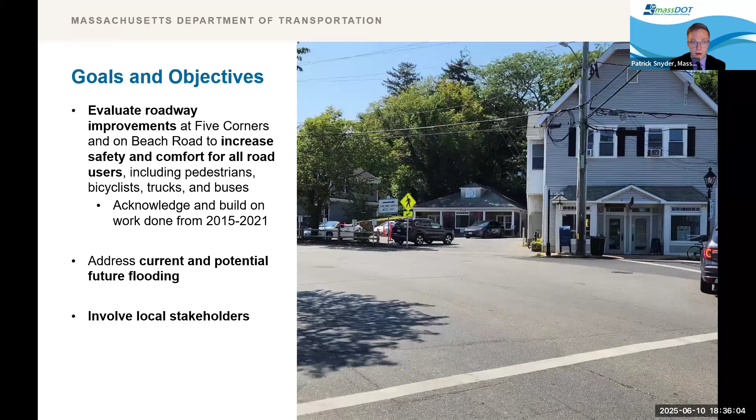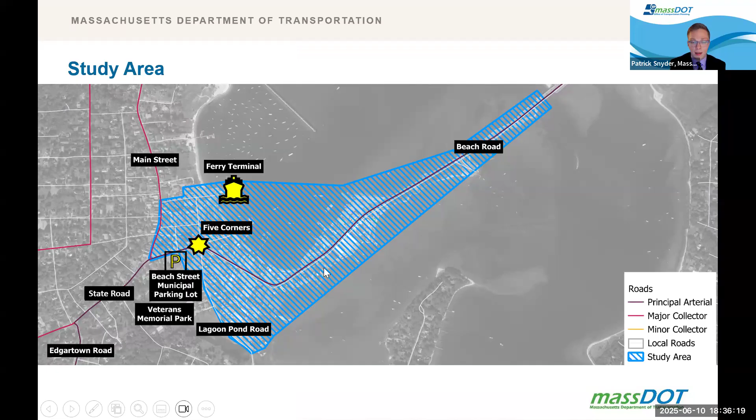MassDOT recognizes this is a key challenge at this intersection, and we want to collaborate with local stakeholders to address flood vulnerability and on decision-making here. This map shows the extent of the boundaries of our study area, which extends along Beach Road to the Tisbury Town line, down a portion of Lagoon Pond Road, and it is also bounded by the Beach Street Municipal Parking Lot, Main Street, and the Steamship Authority Ferry Terminal.

And we'd now like to review our initial flood vulnerability assessment. The existing drainage system at Five Corners is key to any flood mitigation work done at this location. There are outfall pipes in the study area at Beach Street Extension, Lagoon Pond, Main Street, and Beach Road.

These pipes form part of the stormwater management system, facilitating drainage off of streets and properties. MassDOT and the town of Tisbury have identified challenges with the existing drainage system that make it difficult to manage stormwater. The low elevation, effectively at current sea level, makes it vulnerable to storm surge.

Flooding regularly occurs at Five Corners due to backup at the Beach Road Extension outfall pipe, as well as drainage that slopes down to Five Corners rather than to coastal outfall points. The Beach Road Extension outfall pipe also gets blocked up during storm events, which contributes to backflow and further exacerbates the flooding issues.

MassDOT has proposed drainage improvements under Highway Division's project number 609459 to help mitigate stormwater at Five Corners.

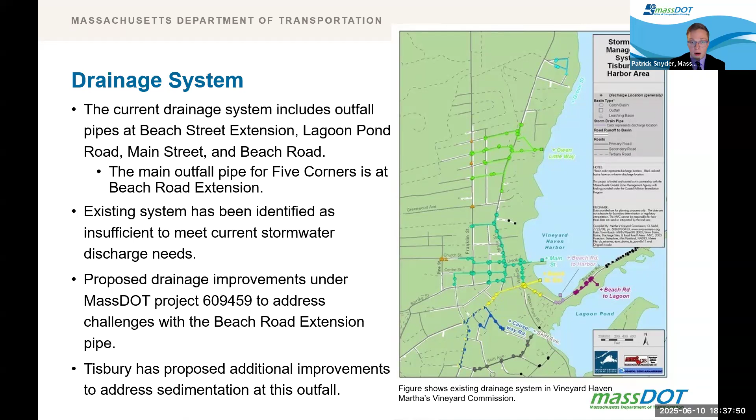As you'll see on the following slides, stormwater challenges are exacerbated by future year flood vulnerability. We will also note on this slide that the town of Tisbury and other stakeholders have proposed additional flood mitigation measures here. We are happy to continue dialogue about that, as there are multiple jurisdictions in this area.

Part of this study involved looking at future year flood models to understand projected sea level rise and how it may affect the study area.

In planning for flood mitigation at Five Corners, it's important to consider how any potential projects could mitigate future flooding, as well as the current stormwater issues.

Stormwater flooding on top of this sea level would exacerbate water levels, as we will see in coming slides. We'll also go over this more during our alternatives analysis review later in the presentation.

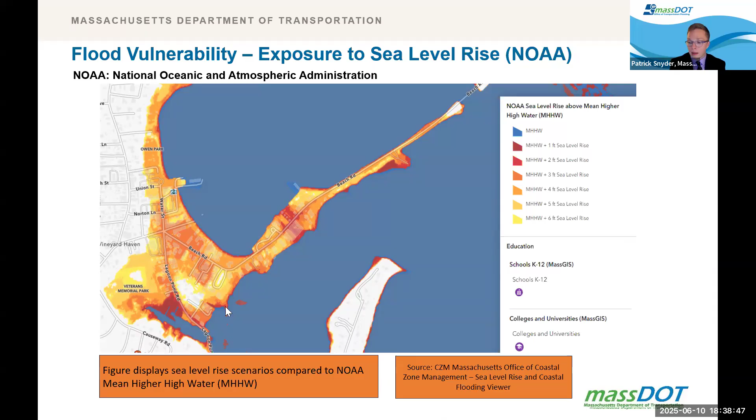The main horizon year we focused on in this study is 2030, and I will elaborate on that later in the presentation during the alternatives analysis.

This data comes from the Massachusetts Office of Coastal Zone Management, CZM, which is the lead policy, planning, and technical assistance agency on coastal and ocean issues for the Commonwealth.

Any future projects to address flooding in this area would likely require coordination with CZM.

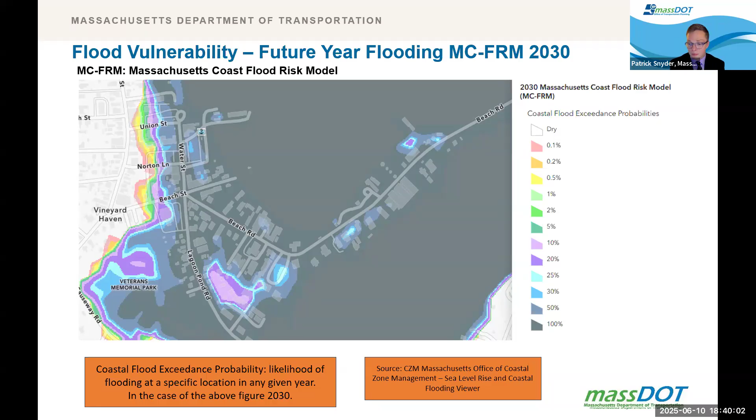This indicates that during a storm event, most of the study area will be flooded beyond the area that already floods today. As part of the study, we carried out flood modeling in order to review potential horizon years to plan and develop concepts.

Per direction, we used the Resilient Mass Action Team model, which is a risk screening tool developed as part of the state's resilience planning initiative called Resilient Mass.

RMAT is a preliminary risk screening tool that outputs results based on categories assigned to assets, such as their critical operation during emergency events. Assets, in this case, being transportation infrastructure, buildings, and natural resources, to name a few.

Inputs to the RMAT tool resulted in targeted planning horizons of 2030, 2050, and 2070.

Mean higher high water level, MHHW, is a measure that indicates the highest level water can reach. For these years, 2030, 2050, and 2070, there was a minimum of 3.7 feet for sea level rise in 2050 as output by RMAT.

This would be during the highest high tides during the year. When it comes to sea level rise and storm surge, RMAT recommended a target planning horizon of 2070, with an intermediate planning year of 2050.

Based on the criticality of Five Corners in the Martha's Vineyard transportation network, the output was to plan for a 1,000-year storm return period, the probability of a storm occurring in a 1,000-year return period, on the stormwater flooding side of things.

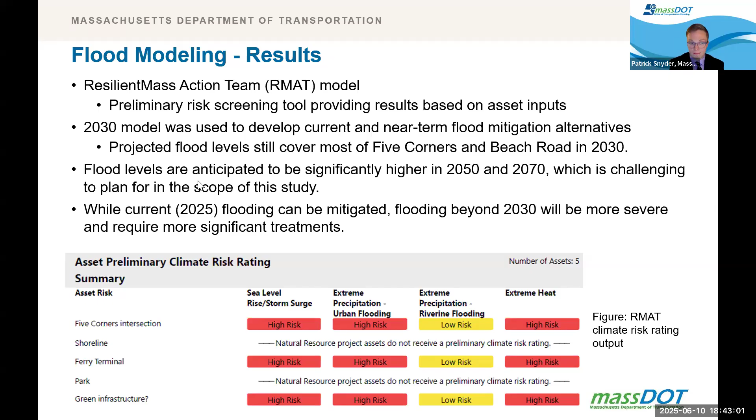At this point, I'd like to pass it to Joe Zissman from our consultant team at Cambridge Systematics to give an overview of our safety analysis, which helped inform subsequent alternatives analysis for roadway improvements.

Thank you, Patrick. We analyzed crash data from 2018 to 2022 for the study area. One fatal crash occurred, a nighttime head-on collision of two vehicles on Beach Road near the Lagoon Pond Bridge. Two injury-causing crashes occurred at Five Corners, one involving a pedestrian and the other a bicyclist. The study area as a whole saw 18 additional injury-causing crashes.

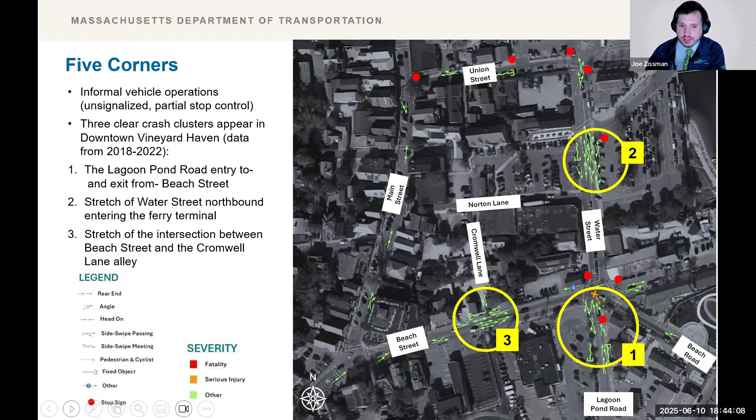Three clear crash clusters occurred in downtown Vineyard Haven between 2018 and 2022: the first at Five Corners on the Lagoon Pond Road leg, the second on Water Street northbound at the access point to the ferry terminal, and the third on Beach Street where it intersects the Cromwell Lane alleyway and the municipal parking lot. Five Corners is designated as a top crash location, and a road safety audit was carried out there, which was one of the reasons this study was carried out.

The study area sees a large volume of pedestrian traffic. It's a village center and business hub for those who visit Martha's Vineyard, live there, and work there. It has a ferry terminal with service to Woods Hole, the island's primary post office, a full-service grocery store, the Black Dog Tavern, many other small businesses, and a small number of residences.

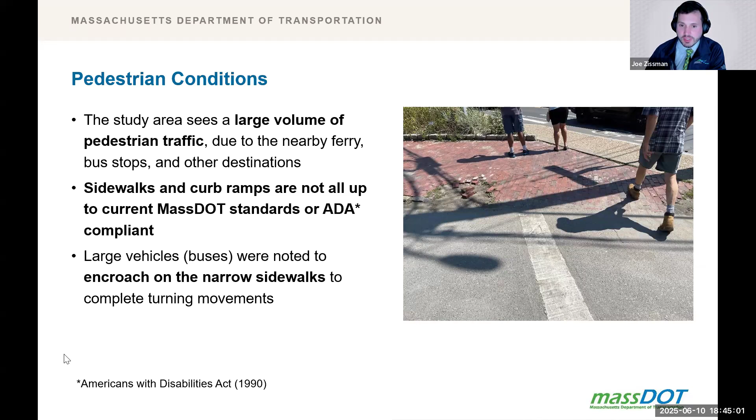Sidewalks and curb ramps are not always sufficient for pedestrians. Some are narrow or obstructed with poles. Brick sidewalks can be uneven for those with mobility challenges. Crosswalks and the ramps leading to them are not perpendicular to the road and are not clearly marked for accessibility. No pedestrian flashers or other pedestrian signals exist. Street lighting is generally poor. Some turns are also too tight for large trucks and buses accessing Water Street, and we observed these vehicles mounting the sidewalk in some cases, a dangerous situation for pedestrians.

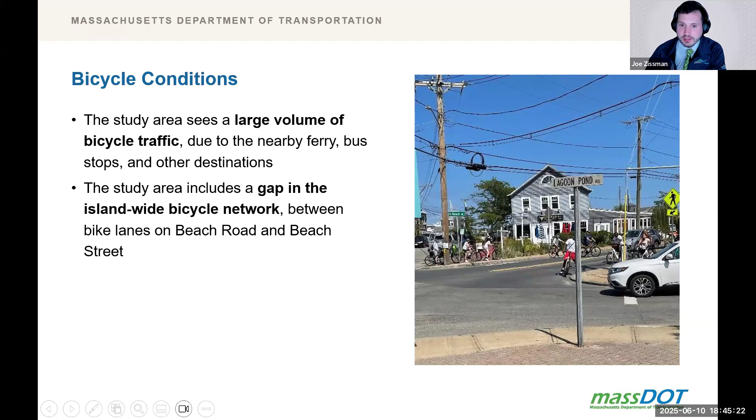The study area sees a large volume of bicycle traffic, driven not only by destinations in the area but also by the strong commitment Martha's Vineyard communities have made to building a robust bicycle network. A gap exists in that network within the study area — a missing link in the island-wide shared use path network between Oak Bluffs and Edgartown through the Five Corners area. On the basis of all this analysis, this study discusses high-level conceptual design alternatives for the study area.

The alternatives have two components that mirror the two components of the analysis. The first, safety and road treatments, focuses on improving multimodal operations and safety, primarily through changes to roadway geometry, signage, and control. The second is adapting to and mitigating the impacts of near-term flooding. While the study analyzed and considered long-term flooding, as Patrick mentioned, more significant analysis will be required as part of any project development.

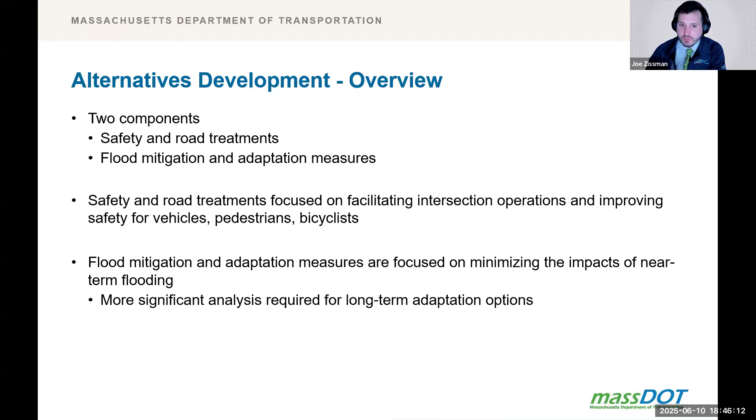The conceptual design alternatives are presented as short-term, medium-term, and long-term, at two locations: Five Corners, and the intersection of Main Street and Beach Street. We will present the alternatives for Five Corners first.

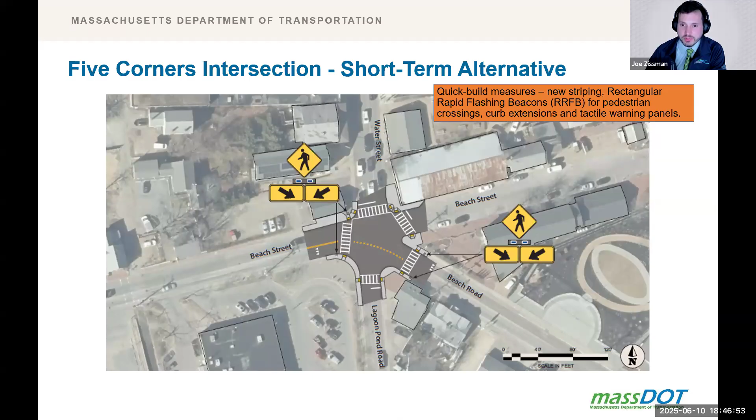The short-term alternative for Five Corners includes rebuilding sidewalks to be ADA compliant, including curbing and curb ramps with tactile strips, realigning crosswalks to be perpendicular with the street, repainting all crosswalks to improve visibility, installing indicator signs for crosswalks potentially with rapid flashing beacons, repainting stop lines on Lagoon Pond Road, Water Street, and Beach Street Extension, painting new shark's teeth yield lines on approaches without stop signs, and painting a curving yellow line to connect the center lines of Beach Street and Beach Road. These are designed to be relatively low-cost improvements that can be implemented relatively quickly.

The medium-term alternative for Five Corners includes the low-cost quick-build measures from the short-term one, but makes two substantial changes to roadway geometry. First, Water Street is narrowed from three lanes to two, allowing for the construction of a shared-use path for pedestrians and bicyclists. Second, Beach Street Extension is raised and turned into a shared street for cars, pedestrians, and bikes — also known by the Dutch term Woonerf. The street would have pavers instead of an asphalt surface and would be accessed via a ramp-like sloping sidewalk from the level of the intersection.

This has several benefits. It creates a clear physical through line from Beach Street to Beach Road and simplifies the apparent complexity of the intersection from 5 legs to 4. The raised surface also potentially allows for stormwater storage underneath Beach Street Extension and resloping of the outfall at the end of the street to improve drainage.

Access to Beach Street Extension would be maintained for all adjacent homes and businesses under this proposal, and it would also still potentially be available for parking. The space could be allocated in a number of different ways during the project. It would just appear less like a typical street and more like a driveway.

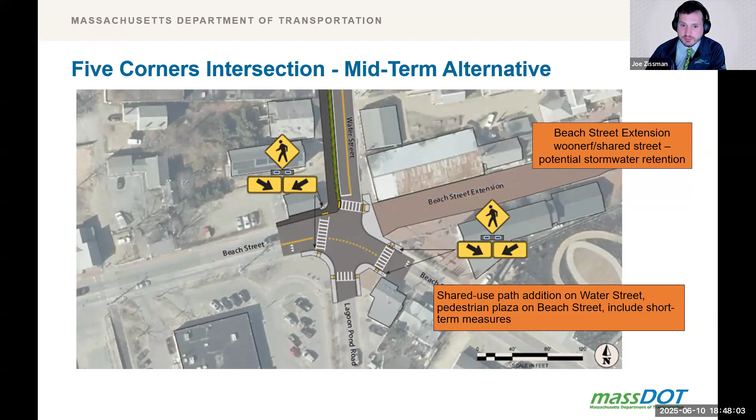2 long-term alternatives were developed for Five Corners: a stop-controlled intersection and a roundabout. The stop-controlled option differs from the prior alternatives by making more substantial changes to roadway geometry and alignment. Specifically, Lagoon Pond Road is curved so that the intersection becomes more perpendicular, resolving the current tight turning radius that brings trucks onto the sidewalk. This alternative also includes a shared-use path along the south side of Beach Street and Beach Road, accomplished by narrowing Beach Street to 2 formal lanes. This alternative may require additional right-of-way, which would be evaluated as project development proceeds.

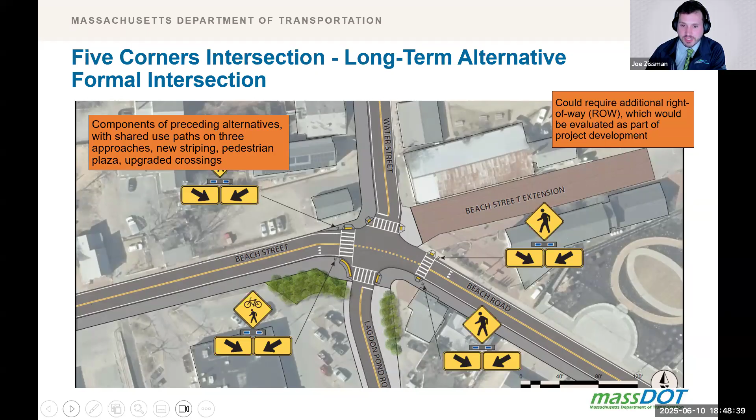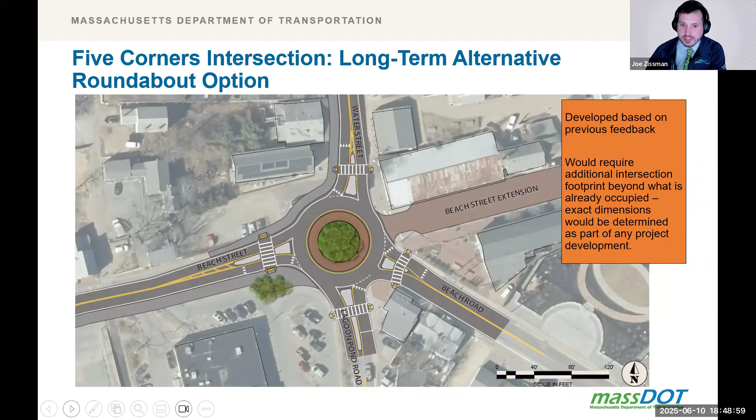The roundabout option at this location has been discussed in the past and would require substantial additional footprint beyond the current extent of Five Corners. This is one possible location where a roundabout could be centered, but it could move all around the potential outline of the intersection. Note that the width of the Beach Road approach at the roundabout prevents the inclusion of a shared-use path under this scheme.

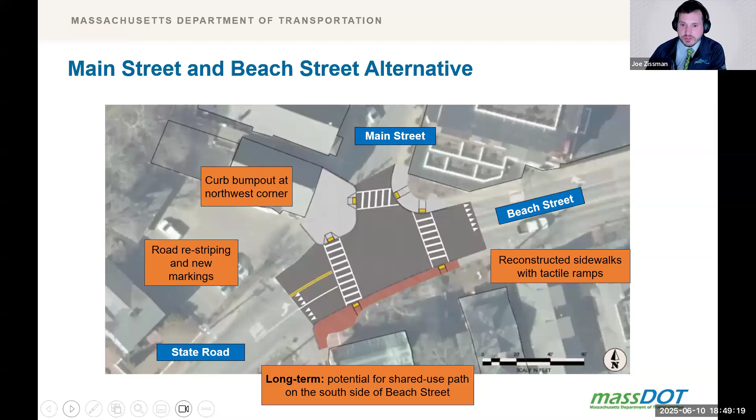A single set of improvements was developed for the intersection of Main Street at Beach Street, consisting of quick-build improvements to sidewalks, ramps, crosswalks, and roadway markings. A long-term enhancement, which is not drawn, could extend the shared-use path from the long-term Five Corners alternatives through this intersection on the south side of Beach Street and State Road.

Patrick will take you through the alternatives analysis, which includes a discussion of infrastructure elevation. Five Corners sits at approximately 2.5 feet above mean sea level in 1988, also referred to as NAVD 88. This study considered raising the intersection in the long term to either 5 feet above NAVD 88, which is 2.5 feet above current ground level, or 5 feet above the current ground level, which is 7.5 feet above NAVD 88.

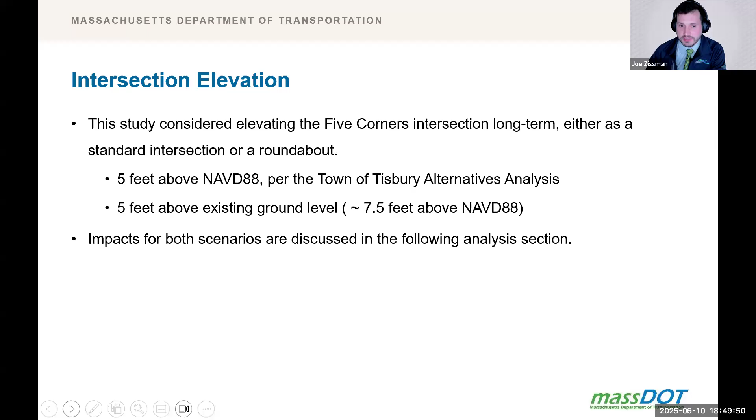Thank you, Joe. So we'd now like to review our alternatives analysis, which is an outline of anticipated roadway impacts and potential flood mitigation measures.

In terms of anticipated impacts related to roadway elements, we've split those up amongst the short-term, midterm, and long-term alternatives. When it comes to the short-term alternatives, these are anticipated to result in safety and operations improvements for pedestrians and bicyclists, as well as vehicles. They would upgrade the intersection to current MassDOT standards and create new ADA-compliant pedestrian infrastructure. Short-term alternatives would likely be insufficient to address the current turning radius challenges for large vehicles, such as buses and large trucks. The short-term alternatives are conceptualized within existing right-of-way footprints.

I'll note on this and the next slide that potential right-of-way impacts are fully evaluated later in the project development process. The midterm alternative for the Five Corners intersection is anticipated to have the same impacts I listed for short-term. The midterm alternative builds off the short-term alternative with some additional improvements, a shared-use path along Water Street, and a potential raised shared street at the Beach Street intersection.

The short and midterm alternatives would likely have temporary construction impacts if they advance to project development. These could be access changes or noise related to construction activities. These impacts would be assessed at a more detailed level during project development, and presented as part of any design public hearing.

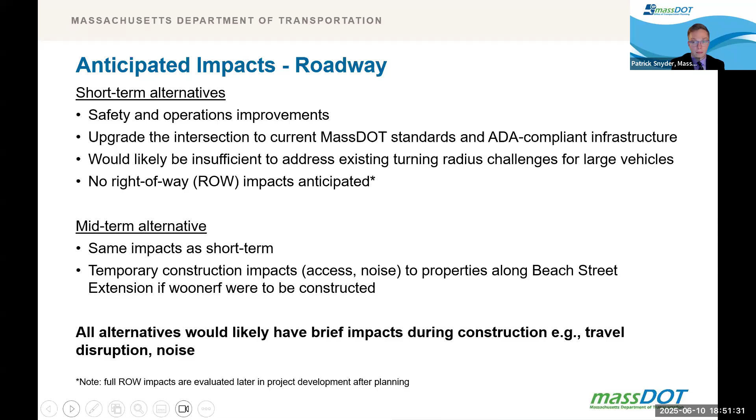Looking at the impacts of the long-term alternatives, they would both formalize the intersection, which is anticipated to have safety benefits. Delineating clear travel path priority would clarify road user right-of-way. The pedestrian improvements would also be expected to enhance safety for vulnerable road users. When it comes to the roundabout option, the number of conflict points for vehicles traveling through the intersection would be reduced. So there are also safety improvements anticipated with that alternative.

Long-term changes at this location could also address the current turning radius challenges for large vehicles that have been mentioned. The long-term alternatives could also increase bicycle connectivity by contributing to the island-wide bicycle route, with the potential for extended shared use paths on Beach Street and Beach Road, alongside a potential connecting shared use path on Water Street.

The full intersection, alternative 1 here, would be designed so as to accommodate the turning radii of large vehicles. This would facilitate travel for large trucks and buses. The roundabout, which we have listed as alternative 2 here, would also be designed to accommodate large turning radii.

It would likely have right-of-way impacts, as the current intersection footprint is somewhat constrained for a roundabout of standard size. For this study, we assumed a roundabout of 105-foot radius, centered on the northwest corner of the Five Corners intersection. The ultimate footprint and associated right-of-way impacts would be assessed in future project development stages.

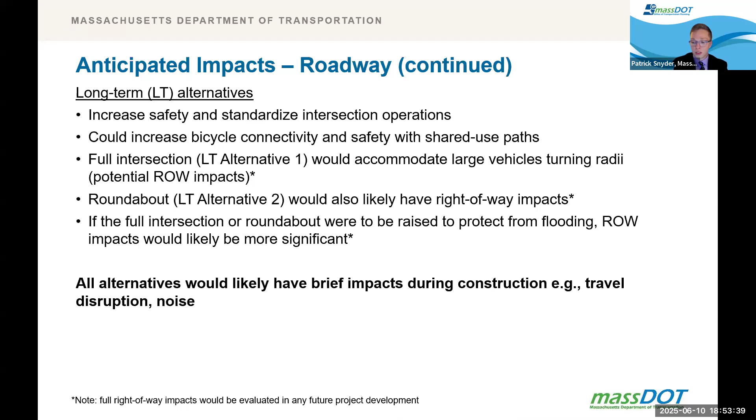As I mentioned on the last slide, there would likely be temporary impacts associated with construction activities, such as noise, access, anything else related to construction.

We've developed high-level summary cost estimates with unit costs based on 2024-2025 dollars and based on historical MassDOT cost data. For purposes of estimation, the short-term improvements are assumed to be implemented in 2025 and the midterm in 2027. Long-term alternatives did not assume a construction year, as they are contingent on potentially incorporating flood mitigation measures. However, they do include contingency costs. These are all estimates and would be subject to change during any potential project development.

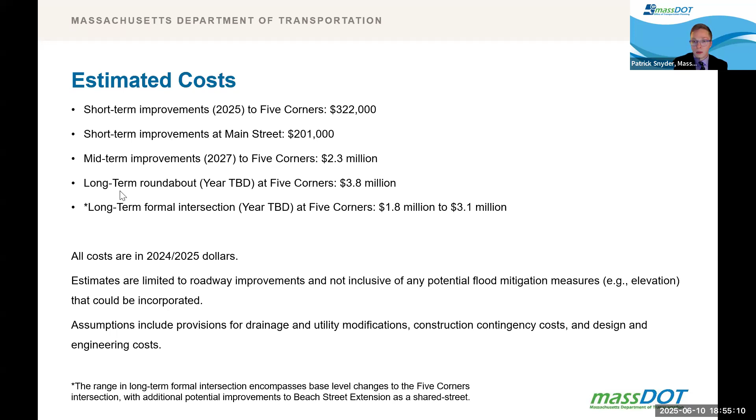Going through the list, we have the short-term improvements estimated at $322,000, with the additional potential improvements at Main Street, the short-term ones being $201,000. Midterm improvements at Five Corners we estimated at $2.3 million. Long-term roundabout would be base level $3.8 million, and the long-term formal intersection at Five Corners would be between $1.8 million and $3.1 million, with the range based at base level changes to the Five Corners intersection, and the larger end of that cost including a potential Woonerf at Beach Street Extension, that shared street concept discussed as part of the midterm improvements.

We discussed a variety of flood mitigation measures for this study. This included a stormwater retention tank under Beach Street Extension or another location, as well as potentially elevating these roadways. A stormwater retention tank in this area could provide storage capacity for flood waters during storm events. However, a location for this would need to be determined based on stakeholder consensus, necessary storage capacity within the tank, and likely a hydraulic analysis.

If Five Corners or Beach Street Extension were elevated, a retention tank could be placed under the intersection itself. Along with this would likely be the need for a pump system, which would need to be maintained. That being said, because of the anticipated volumes of floodwaters, a stormwater tank might be insufficient and likely would not protect the study area from wave action along the harbor line coming in from the coast. Hydraulic analysis of these effects is outside this study's scope of work.

Along with the impacts of flooding itself, with any associated construction here, there would be those temporary impacts we discussed: noise, access. There would also likely be right-of-way impacts to abutting properties if any infrastructure here were elevated and raised.

The elevation levels that we considered during the study, based on internal discussion and suggestions from the Town of Tisbury and the Alternatives Analysis Report, which looked at flood mitigation options, were 5 feet and 7.5 feet above the NAVD 88 measure, the standard benchmark for sea levels. Stormwater flooding in 2030 is projected to be above these levels, at about 7.8 feet near the shoreline in a 20-year return period, and at about 11 feet in the 1,000-year recurrence planning horizon. Return periods, which I referred to earlier, are benchmarks that indicate how severe flooding will be in a given year based on the recurrence scenario.

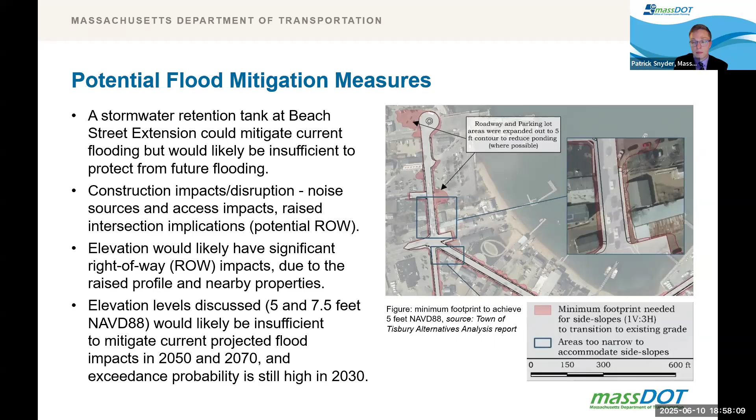Considering all of this, the roads in this study area would likely need to get elevated above 7.5 feet above NAVD 88, the level of which would need to be determined during project development. Naturally, this would likely have significant impacts. Thinking about the 2030 horizon year that we evaluated, with the time that it would take to design, engineer, and implement a project, the flood mitigation measures we developed in this study could become obsolete soon after completion.

So, looking at these impacts, we do see a significant amount of flooding projected for 2030. When we think about the project development timeline, the time it would take to initiate, design, engineer, and construct a project, that likely approaches 2030. So any implemented alternatives outlined in the study could quickly become obsolete and likely would not be sufficient to protect from flooding. With the projections for 2050 and 2070 being more severe, these flood mitigation measures likely would not address flooding beyond 2030 either.

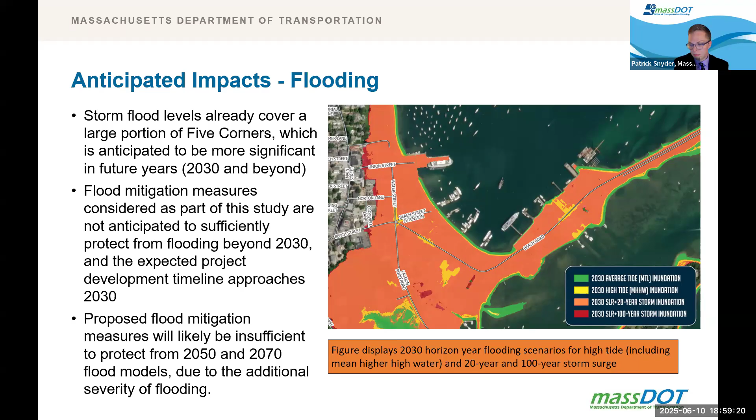Looking at stormwater, which further increases the water elevation and causes more significant waves, building on that flooding: for the 20-year storm event in 2030, this could be between 7.7 feet at the base level, with waves potentially causing up to 8.8 feet of flooding. When we look at the 100-year storm event in 2030, the anticipated flood heights are higher, with a 9.3 base level and 10.4 feet including waves.

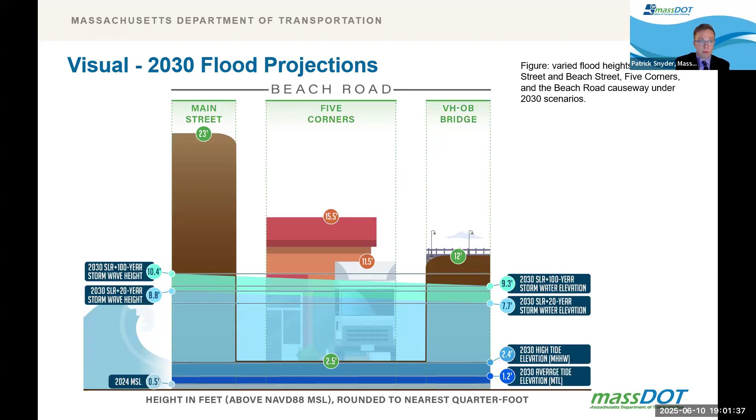So we've reached a point of discussion about how high roads could get raised if they were to be raised. This requires more detailed analysis that would need to come during project development after we conclude the study process. We would want to collaborate with local stakeholders, such as the town of Tisbury, Steamship Authority, and other property owners before advancing road elevation as part of any potential project.

So all of that said, we'd like to discuss our proposed next steps and recommendations based on the results of this study.

This study is being carried out by MassDOT's Office of Transportation Planning, discussing the results with our counterparts in the Highway Division. The recommendation was to advance project number 609459, which would alter part of the drainage system at Five Corners to address current flooding.

Work under this project would address challenges with the existing drainage system, including pipe slopes and the backflow at Beach Street Extension that worsens current flooding at Five Corners. More significant flood mitigation measures would need to be discussed with area stakeholders, which we are prepared to do.

Thinking back on the flood projection scenarios, 2030, 2050, 2070, for this study we evaluated 2030 as our horizon year for flooding. The typical project development process includes design, engineering, and construction. With the time these steps would take, any potential project at this location would run up around the 2030 horizon year. Thinking about how significant stormwater projections are in 2030, let alone 2050 and 2070, we would need to collaborate as a larger group since the affected area extends beyond MassDOT jurisdictions.

As MassDOT considers advancing a road project in this area, flood mitigation measures could be incorporated, but we do want to achieve consensus on what those are with local stakeholders.

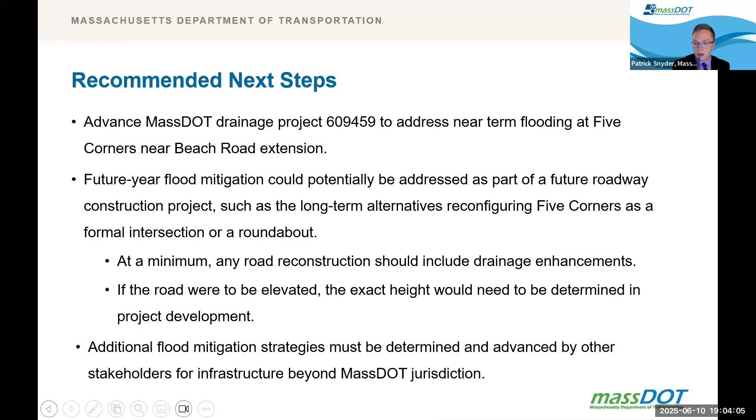Thinking of what comes next after tonight, today was our second public meeting of the study. In the coming weeks, we're going to work on organizing input on the alternatives and analyses to finalize study recommendations and organize for what comes next. Looking ahead, MassDOT will continue to coordinate with local partners on next steps.

At this point, we'd like to open up the floor to any members of the public in attendance who wish to speak or ask questions. We do welcome your questions, comments, feedback, etc. We do have some procedures to give you an idea of how we carry out this process. You can click the raise hand button at the bottom of your screen to request to be unmuted for verbal questions. You can also use the keyboard shortcut Alt-Y on a computer. You can also use the Q&A button at the bottom of your screen to type questions, comments, etc.

In the interest of allowing everyone to speak today, we ask that you share one question or comment at a time and limit it to 2 minutes. If you have more to say, you're welcome to share additional comments and questions after others have had the opportunity to speak. If you're joining us by phone, you can dial *9 and I will call out the last 4 digits of your phone number and unmute your audio when it's time for you to speak. Finally, a reminder that this meeting is being recorded and all questions and comments are subject to disclosure for public records. By speaking or submitting anything in writing, you're consenting to be part of the record.